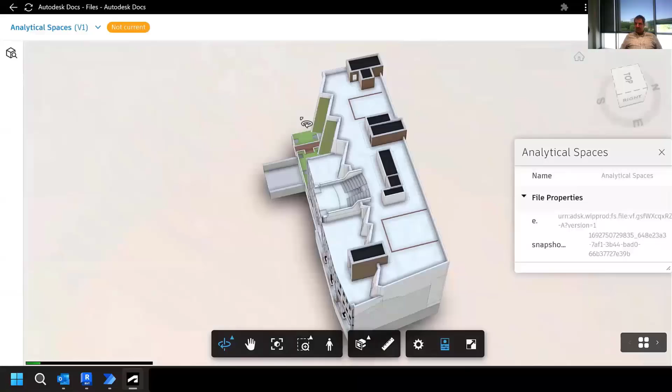So this is kind of it in action. Here we are in ACC. And if you go in here, you can see there's a little version control, but this is a data exchange with pretty much all the geometry from that Snowdon Towers model. And then another data exchange that I just captured some of the energy model stuff and put in here. So it's kind of cool - you can view it. There's actually been some enhancements in the viewing, and this is actively being developed.

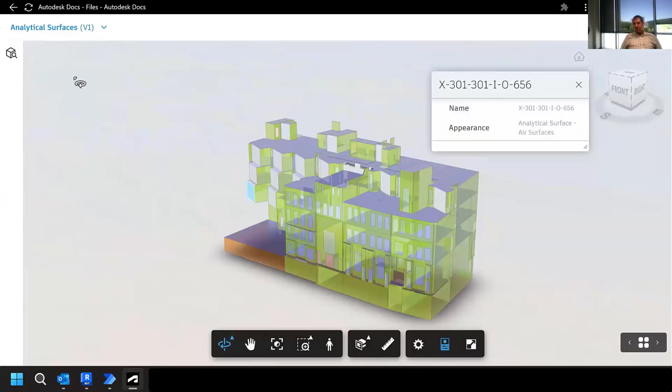Something cool about this too is now a senior guy could get in here and review some of this stuff without opening up Revit. So pretty simple interface to start looking at stuff. Yeah, these are all kinds of data exchanges that we did for this presentation. We won't get into that workflow, but we had an assembly that would be prefabricated so we can get that geometry back into Revit.

So most of them can write, some of them can only read. For example, Power Automate can only read, Power BI can only read, but most of them are bi-directional. But what this really does is, if we think about going back to our engineer at the center, it lets us communicate a lot better with all these different programs and exchange information back and forth. So one guy could be doing a facade in Rhino or something like that.

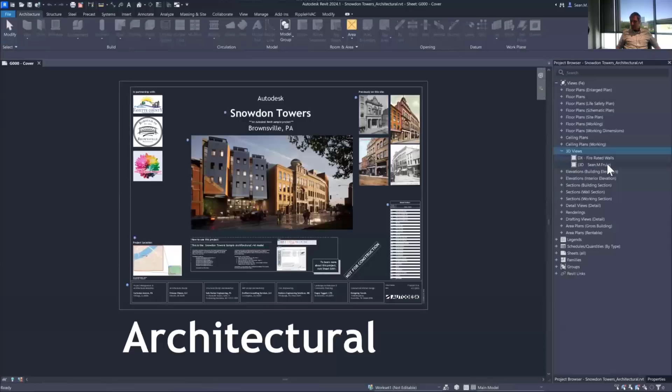So this is the demo. I might skip over some of this pretty quick since the videos are kind of long for this time frame, but we can get going. This first part is how to create the data exchange—you have to create it from a 3D view. Here I'm just duplicating my own 3D view.

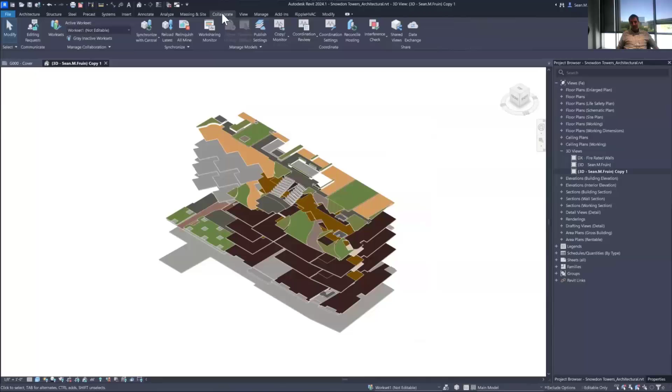Something interesting is that in a 3D view, rooms and spaces do not show up by default. So how do they get into a data exchange? Well, they're kind of there by default—the catch is you need at least one piece of geometry to make them show up. I didn't want to take the whole model to make the data exchange too big, so in this situation I just used the floors.

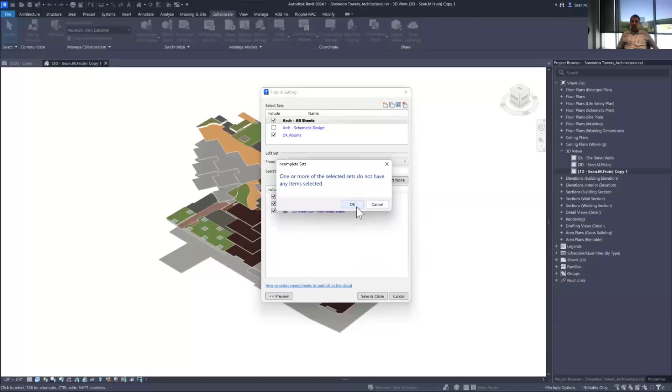Here we're doing it through ACC to publish and create the data exchange. To do that, you have to publish the 3D view, and then from ACC you can actually create the data exchange. That's what this example does.

Let's skip ahead a little bit. So here's our published view right here, and if you go to the published view and click the little ellipsis, you'll have a button that says, hey, create a data exchange from this 3D view.

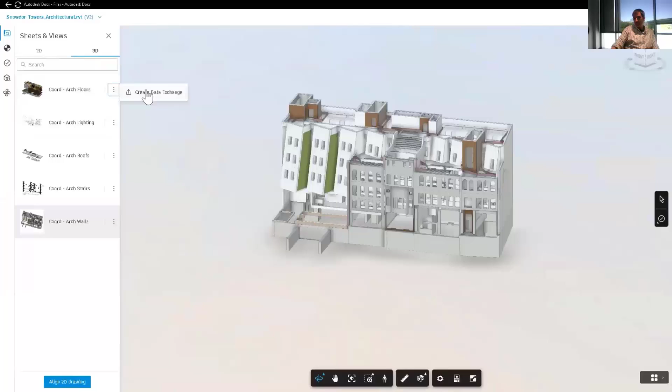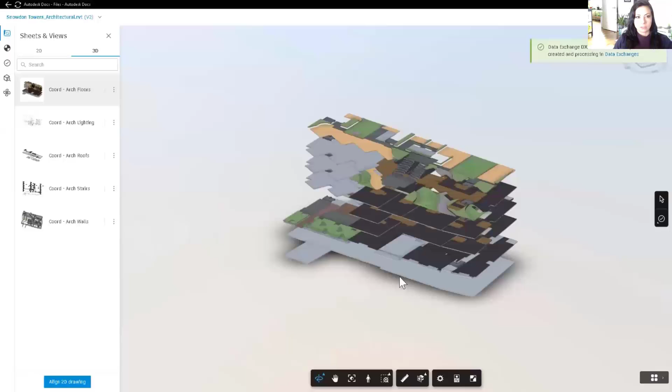Then you have to pick a folder. This is going to be very repetitive because we do this a lot—it's pretty much the same workflow no matter which software you're in: pick the hub, pick the folder, name the data exchange, and send it up to the cloud. What you see is what you get—you export from the 3D view, and in the data exchange, whatever was visible within that view is what you're going to retrieve. You can see it's spinning right there; it does take some time to get up to the cloud, but that's okay.

So now the next one is looking at Power Automate, if you're not familiar with it. This is kind of talking about point two, where we can go to templates and simply hit Autodesk as a starting point.

So here we're going to start off with the Teams notification when a data exchange happens. The default one was when a data exchange is created, but I don't want that. I want it when a data exchange is updated. So we are going to build this one from scratch.

So here we hit the flow, we type in the flow name, and then we search Autodesk for triggers. This is what starts the flow. Here we can see when a data exchange is updated, then trigger the flow.

Again, different UI, but same steps: here we're picking our hub, then going to the project, then picking the folder. Like I said, it's gonna get really repetitive. They're actually looking at ways to speed this up. I don't really know how they could do that yet, but maybe some AI or something.

So next one is data extraction. This one, I just want to look at, hey, can I get data from Revit and get it into an Excel? And this would be kind of cool because you can set up views to be very particular on what is in that view for the data exchange.

Just for sake of time, I think I will skip some of this, because again, it's creating the data exchange. So I'll leave it because this one is creating the data exchange through Revit itself. So there I have the energy model.

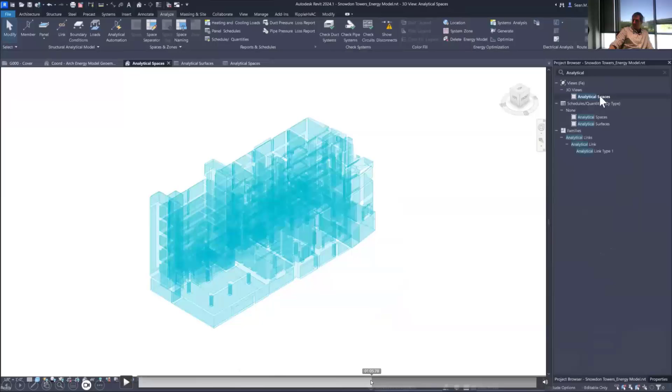Here I am changing to show the analytical surfaces. So again, whatever is in the view is what's going to show up in the data exchange. The caveat is spaces and rooms just automatically show up. I think levels too do that behavior.

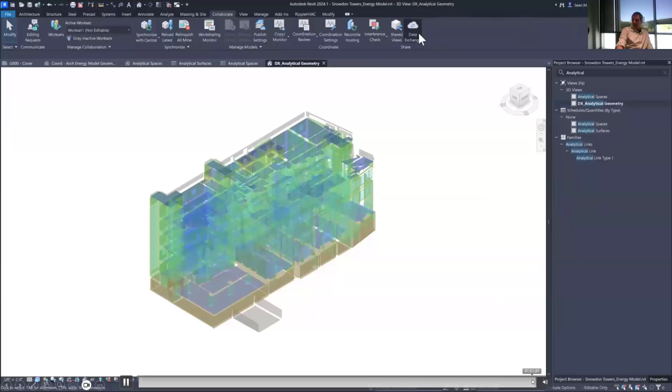So it looks like this video is just on setting it up, and then this one is creating the data exchange. So you go up to the ribbon, click data exchange, this window pops up - same thing, you're going through the folders, you're selecting it. You can actually filter stuff by categories, so another way to filter is by view or by that dropdown with the categories.

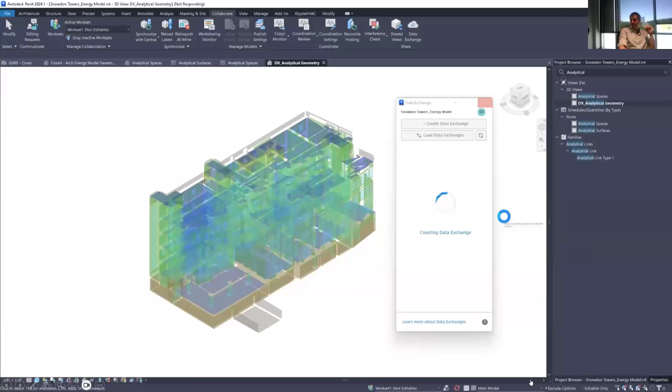It makes you save the project before you create the data exchange. But I think this way is a little bit easier than the way of going through ACC that we did in the first example. So with the ellipsis, we can see, we can update the exchange, we can select the elements in the exchange - there's some stuff to do there. And then sure enough, there's our data exchange on ACC now.

So in this one, another Power Automate workflow. Here I skipped the steps of filling all this stuff in because I told you it gets very repetitive. But now we're going to look at writing the stuff to Excel. So the biggest...

This was a lot harder than I expected it to be. Again, here we're just going down to the projects to get the properties. So right now we're extracting the properties that we want from the data exchange.

The big thing that threw me for a loop here is to write to Excel, you have to use a table, and it's kind of restricted in the way that I can't just rewrite it - it wants to append everything to the bottom of the table rather than just overriding it. And there's some really complex workflows out there to say just append the new stuff.

But in this case, I don't even remember what I did. I created a new worksheet to get new data. So every time this data exchange would run, you would actually get a new sheet with the new versions of data. Does that make sense?

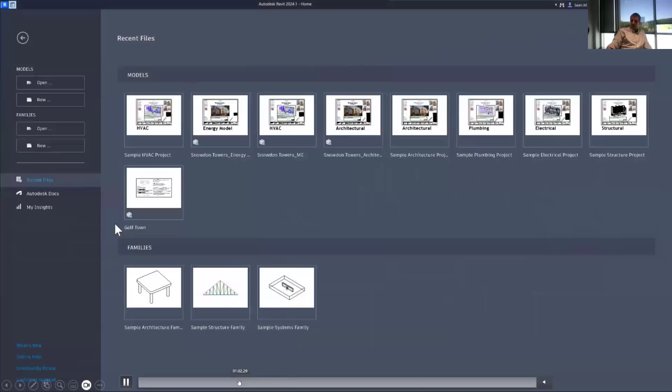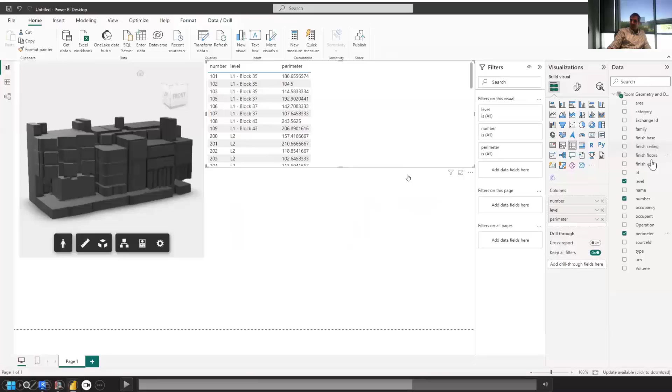This just goes through the video with all the details, but I'll let you guys look at that inside the handout. Then we go into Power BI, and you can see you get the geometry in there, and then you can make tables. There was an issue at AU where I was trying to color code this stuff, and we're actively working on it - so I could say, give me all the ones on this VAV box or this air handling unit, make all the rest transparent, and make those ones red. So a lot of cool stuff, and this is something I'm really excited about. Again, with Microsoft, there's so much stuff you can do.

Yeah, so outcomes, again, we kind of hit all that stuff. Work together, I think, a little bit.

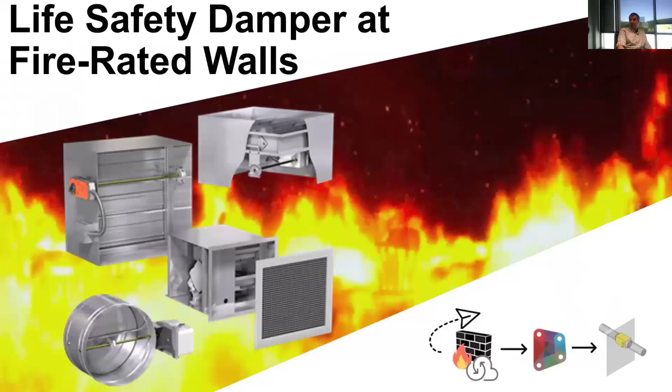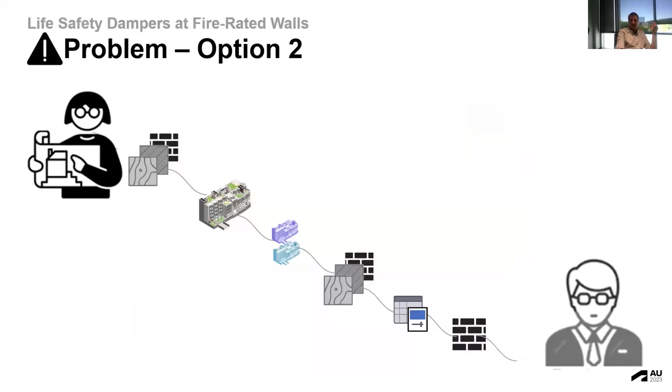So the next one is looking at dampers. The problem is I just need fire rated walls. Solution one, Where's Waldo - no one wants to go around the floor plan and look for all the fire rated walls. Solution two is a little turbulent, where the architect stuffs all the info into a Revit model, and it's up to us to figure out how they name fire rated walls. Did they actually use the parameter? Are they just using a detailed line?

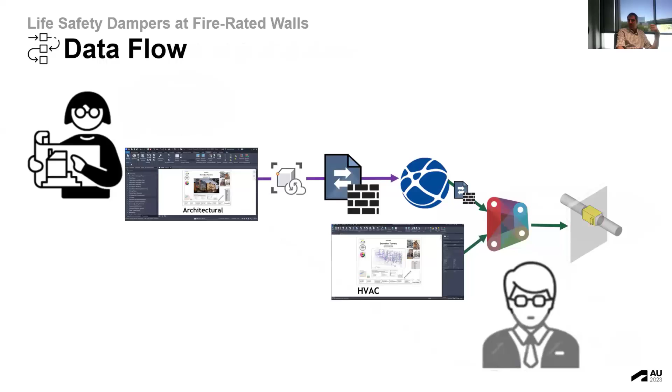A better way might be, even a slide my 3-year-old could go down, is to use a data exchange that just contains the fire rated walls. So the architect would create the data exchange from their end. Within Dynamo, I'd consume that data exchange, take the duct geometry from my model, and then place the fire dampers.

That's essentially what the script is doing. You know me too well. Yes, and it cuts out so much with the link models and stuff - which they just added the link model nodes too. But this is just a much quicker way, I think, to do it. I have a video coming out on Monday about that. Nice, so then we can debate next time we're together on which way is better and quicker. But yeah, this is definitely a collaboration type of way. And then the idea is if we set all these up, I can just sit back, relax, smoke some cigars, and have fun.

Cool, so let me cover this part real quick - sorry, I did the last one really fast. The Power Automate stuff takes quite a long time. Great, yeah, the new Dynamo nodes - so they've got this stuff. If you've got the Autodesk data model, it's new, so they have nodes for that.

This all uses GraphQL, which I'm going to try to explain really quick. And the other cool thing is they're starting to get it to work with Dynamo Player. Right now it's read only, but for example, in the fire damper example, it'd be really nice if you could do that through Dynamo Player without having the end user open up that Dynamo graph and get scared, because that's what end users do.

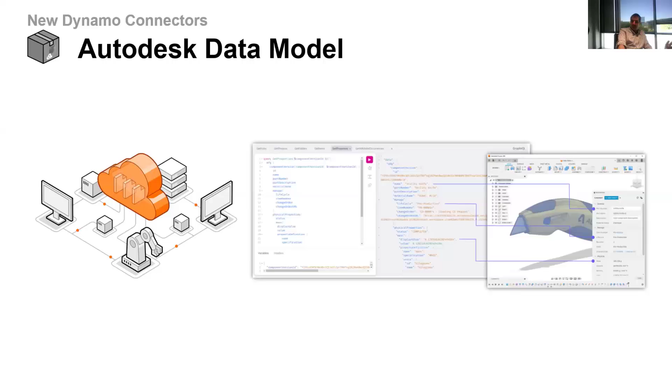The data model is really interesting - it's this idea of being able to select and share this whole idea of granular data across different platforms. And the data model is really the foundation for all that.

The GraphQL - I'm still working on trying to explain this. So GraphQL, the other option is REST API, which is like the old way of doing it. GraphQL was created by Facebook in 2015, so it's fairly new, and it's just a much faster querying thing. I asked ChatGPT to explain the difference in a way I could understand, and it came up with this crazy thing about food orders. Yeah, I will not read that out loud.

This is my interpretation, my simple explanation. It's really about how the filtering is done. With GraphQL, the filtering is done more on the cloud side, whereas with REST, all the filtering is done on the PC side. Therefore, a lot more information has to go through our wires - a lot more ones and zeros have to go through our wires with REST. So GraphQL is faster for that reason, meaning you can specify: I don't just want walls, I want walls that contain the word fire in them, to get fire rated walls.

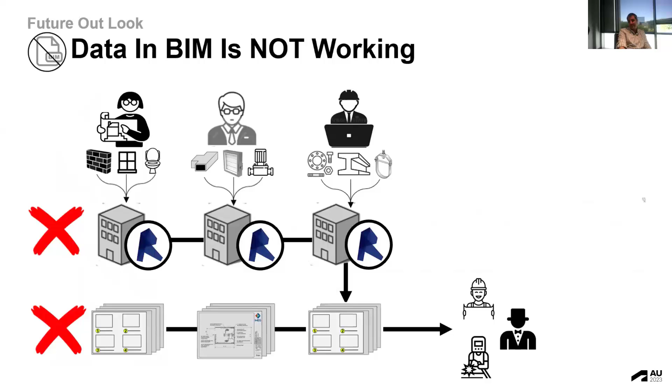I think the traditional PDFs, that's not great. These big bulky Revit models isn't great either. I think this cloud way is kind of this middle new ground way. Honestly, just trying to think about this in the future, I see our projects being in the cloud, and it grows and we pull from it in the life of the project. And then all of our different programs become just these authoring tools.

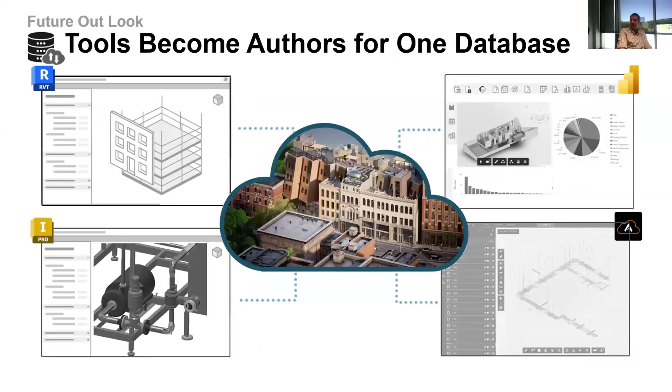I don't think Revit's going anywhere, but it'll just be used in a little bit different way, where I pull stuff in that I need to do my work in Revit, and then push my results out into the cloud model. I don't know if I'm right, who knows, but there's a lot of possibilities I could see, right?

So you could do fabrication stuff and then do energy modeling really quickly in Revit, testing out different facades and impacts. So you can just push that stuff around. And then, yeah, I think there's some rippling effects.

Autodesk, I think this came from Brian. He said Autodesk has positioned themselves to be the app store, the Apple App Store of our industry, where a company like his has to build the platform on theirs. Is Autodesk going to take 30% out of his cut? Are they going to charge us for tokens? That's still up in the air. But yes, moving forward, I think all this is kind of the way that we can get better access to data.

Absolutely. That was fantastic. Yes. And I'm really excited, like you said, where the future is going to take us.

Yeah, I don't even know the answer. No, I don't know if any of us do. I know none of us does. Who knows where AI will take us, it's going to be really interesting. Hopefully it will be a faster adoption than just Revit alone, right?

One last question: is there a special process for federal projects if you're going from Revit to Power Automate, since it's not FedRAMP with ACC? I do not have the answer to that, that's above my pay grade. Maybe somebody at Autodesk will know. From the first conversations, it sounds like no, if I'm understanding the question right.